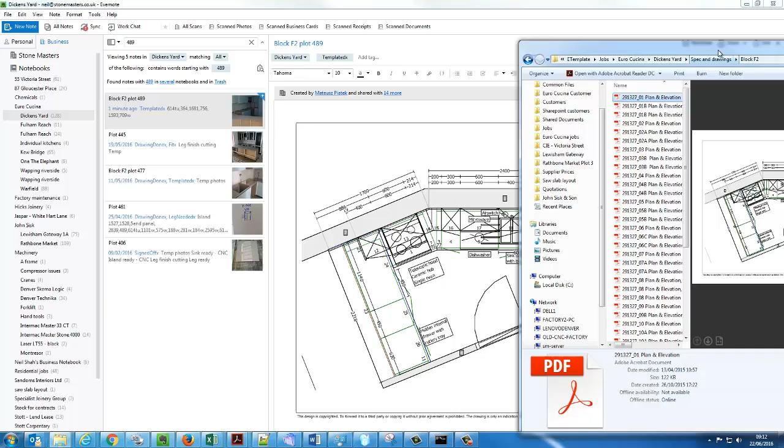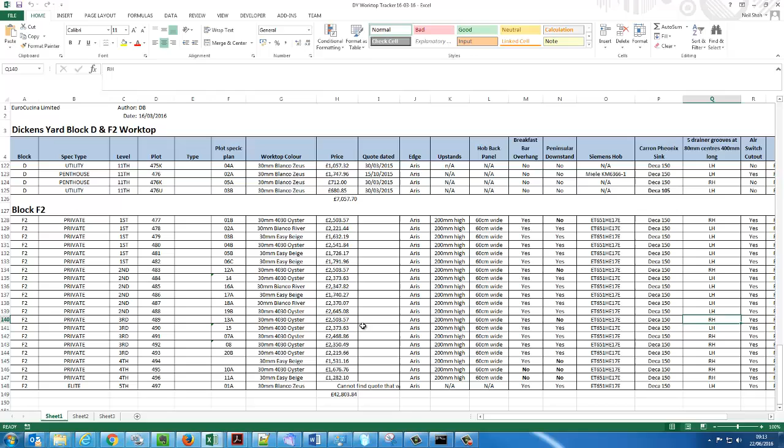The other thing to notice is that the other plots that we've done in the past are 477 and 483. They're more or less the same. So we quickly just check the specification of these plots. So this is block F2. 489 is drawing 13A, 483 12A, but they are the same shape. The point is, are these the same in terms of the sink, which is a Deca 150, this one here, as well as any tap holes and hobs. They're more or less the same.

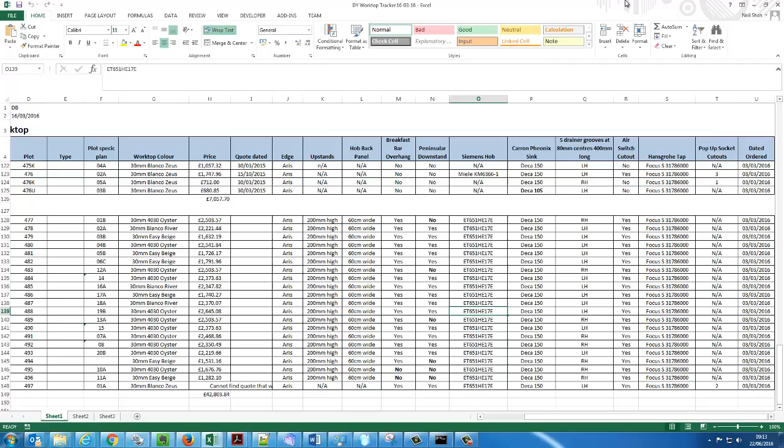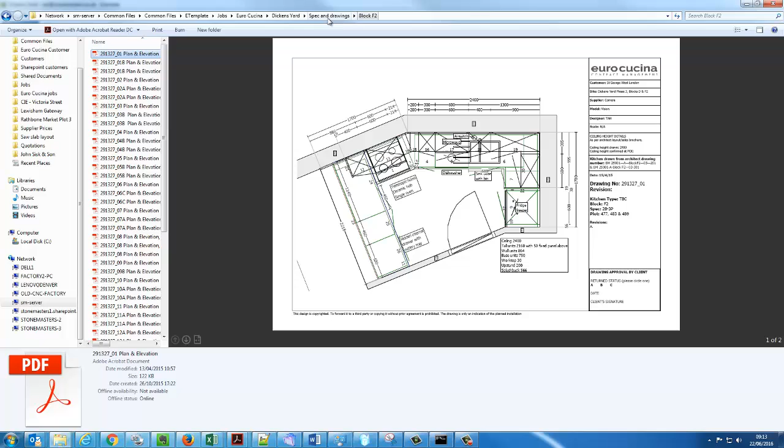So we know we can find the old drawing of 477 or 483, open that up, and then import in 489, the original laser file, to clean it up. So let's find the cutting file for 477 or 483. 483 we have here. That is exactly the same. So we know we can copy the sink and the hob details. I'm a little bit worried because I've just seen the sink with the wrong-handed direction. I've got to make sure that this is correct. I'm going to pause the video whilst I check.

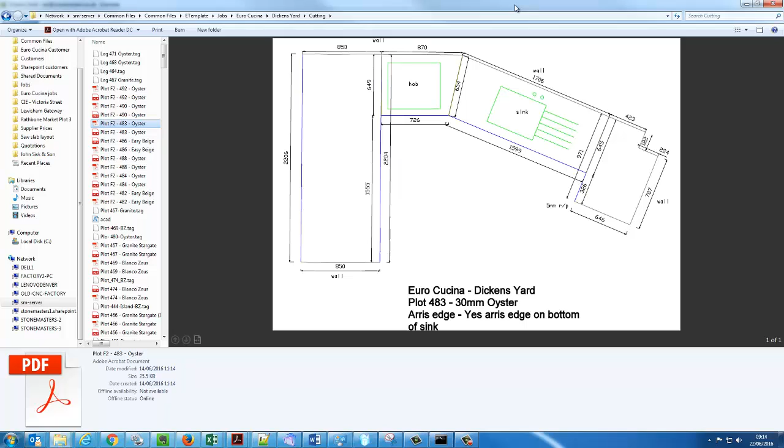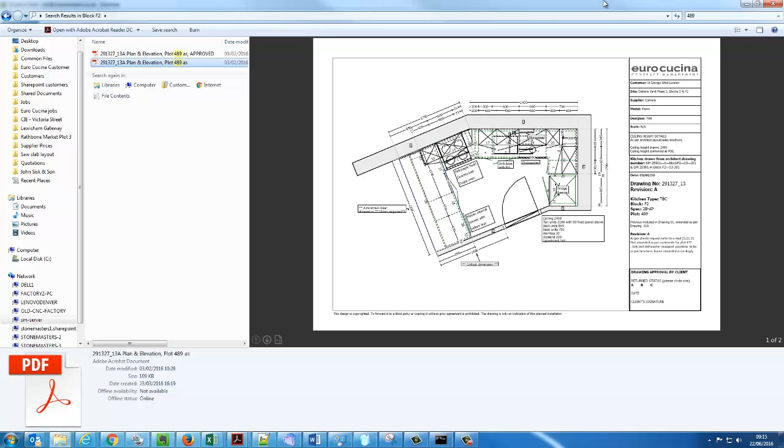So it turns out that the better way of doing this is to actually search. So when you get to the drawings folder, we want to search for the specific plot, and you can see that this has been approved by the client, status A, with the sink in this direction. So that's really the correct drawing. That's the one that we want to pull into this. So I want to delete this because this is obviously an old drawing, and drag, let's get 489. I'm going to drag this file into here, which is the correct plan with the sink in the correct place.

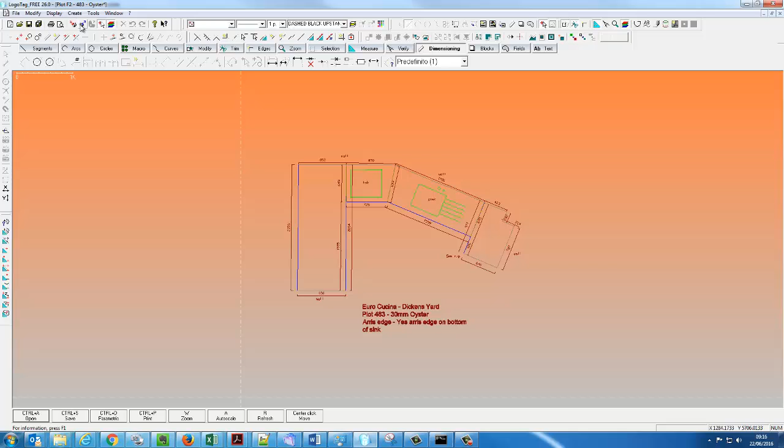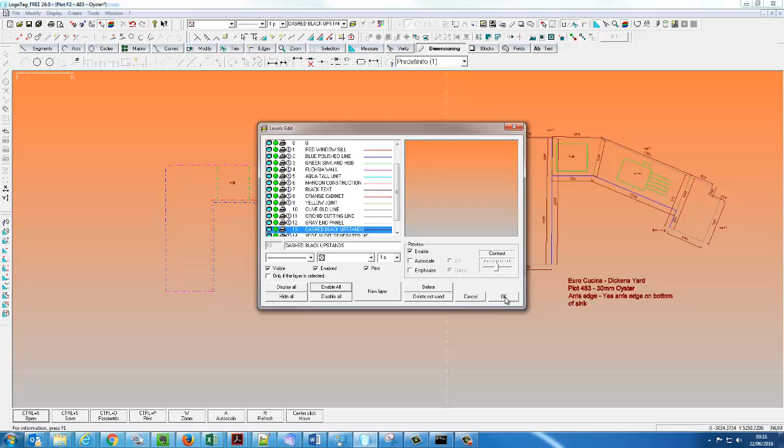So I know that I can now open up, let's copy this path to find plot 483. Here we go. Right, next job is to import in the original laser file for 489, and to unlock all the layers and display all the layers. So display all, enable all, and that way you can see all the layers, and it's now opened up all the layers here. Change these to the correct layer. So that's the tall unit.

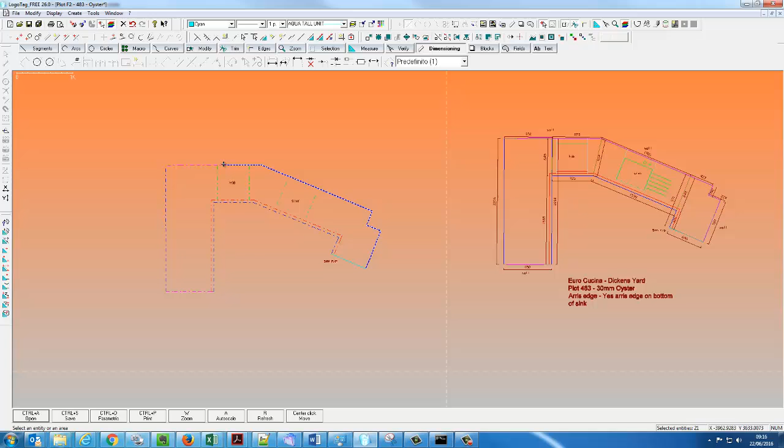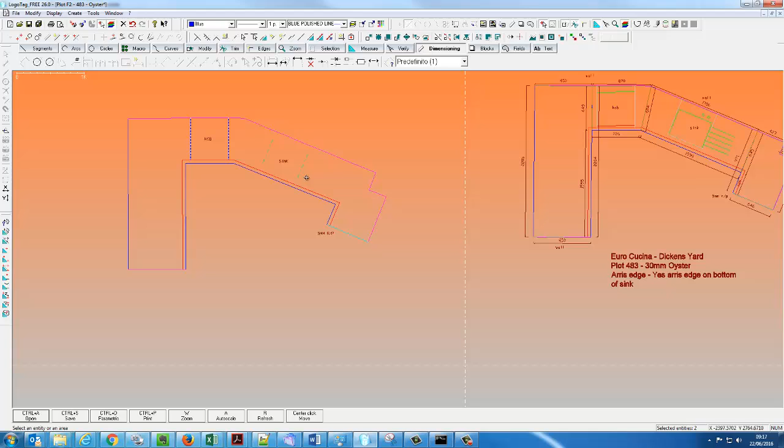Oops. Now these are your walls. So change all the layers to the correct ones. Polished line. Cabinet line. I forgot this polished line one. This is this one here.

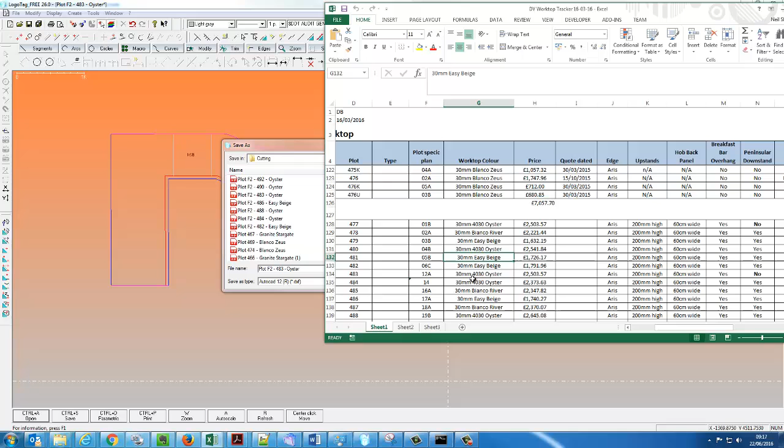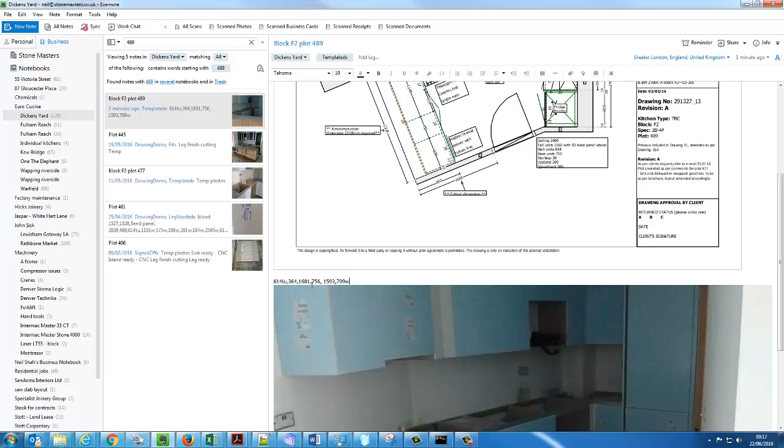Right, next job is to save as a different file name so we don't mess that up. Just check that the material is the correct one, so 489 is oyster as well. So just change that to 489 and we're good there. Next job is to check against the Evernote dimensions. So we've got dimensions given to us here of what's been templated. So 614 tall unit, 364, all these we've got to just check to make sure that this job has been done correctly. So a bit of back and forth between these.

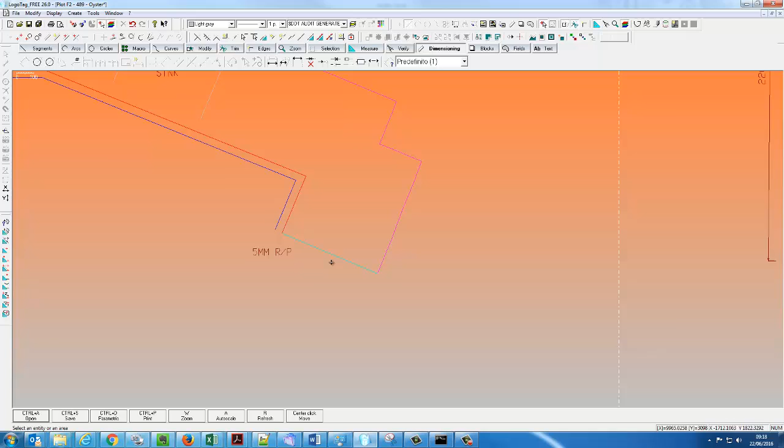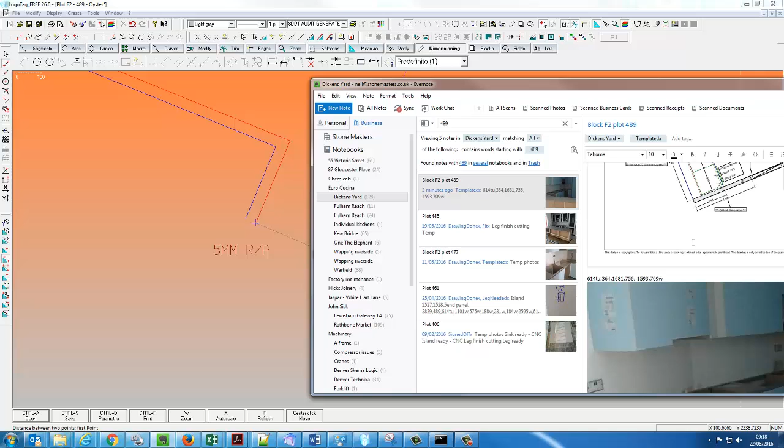First thing to understand is that the tall unit tends to get over exaggerated here, but if we use this measuring tool, this one here, we can check the distances and compare them. So 614 tall unit, now 364, so 709 for wall. Now we're gonna have the pillar, I'm guessing, which is 364 or something. 269. It's not on there, which is a pain. So I'm guessing there's nothing here either, but let's check the longer one.

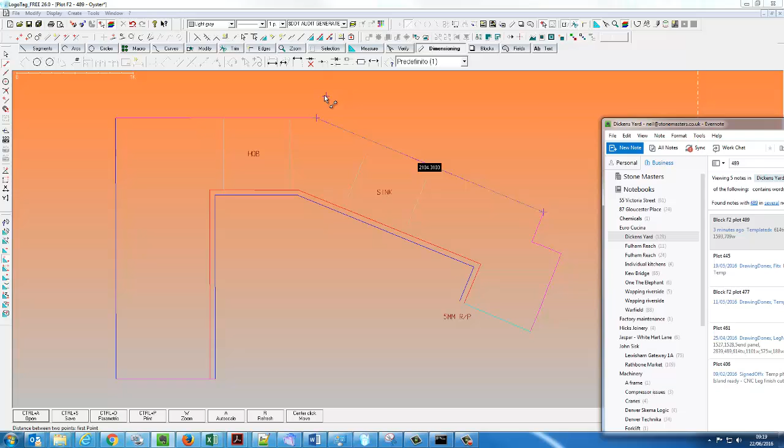2104. That measurement's not on there either. That's not helpful. That measurement will not be there, so let's start checking some of these. 1593. That's there, that's correct. 761. 0.7. So that leaves me with a question mark as to why that is 5mm bigger.

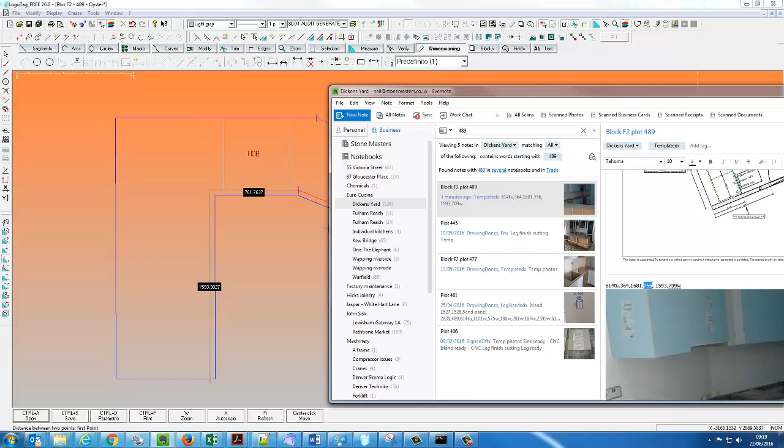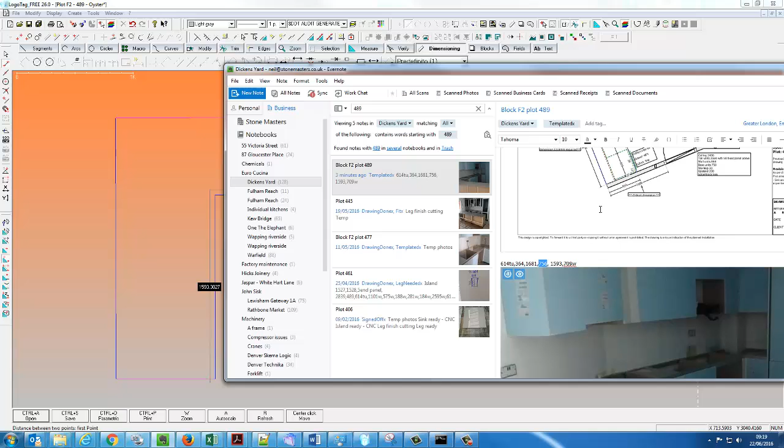1681, and then this one must be the 364. So that's correct. I need to pause the video whilst I call Matthias and ask him why this measurement is out and what are the wall measurements. So the story from the templater is that this measurement was incorrectly noted here, but it has been checked on site, so we can continue.

Right, so now that we've ascertained that the drawing is okay, we need to add in joints. We need to add in the sink and the hob, which are the same as this, and then we need to put in the title block and the cutting line, and then we're good. So let's start extending out for the joints.

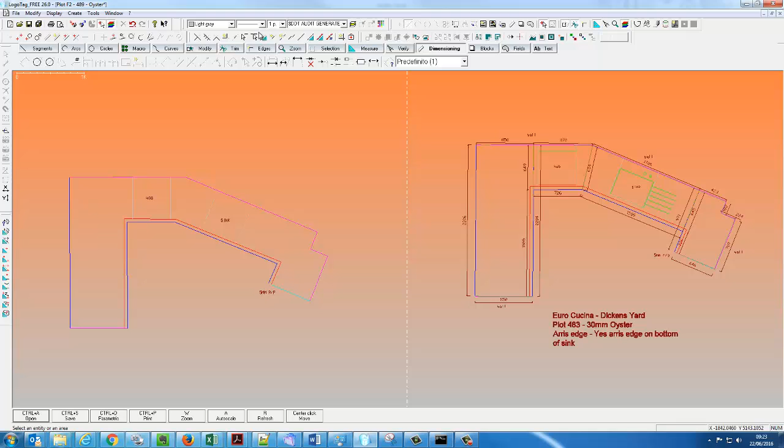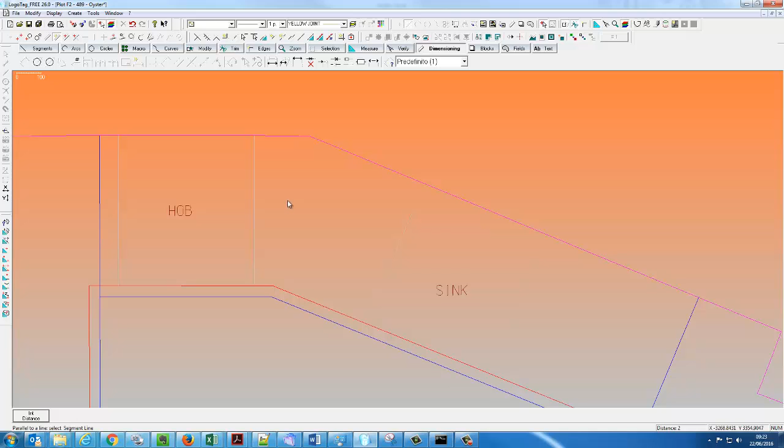Now this joint here is basically a single line from the corner to here, and then we can start moving it out to create a 1mm joint between them. Normally it's a 2mm joint. Well, let's do the 2mm joints anyway on the edges. Clean that up.

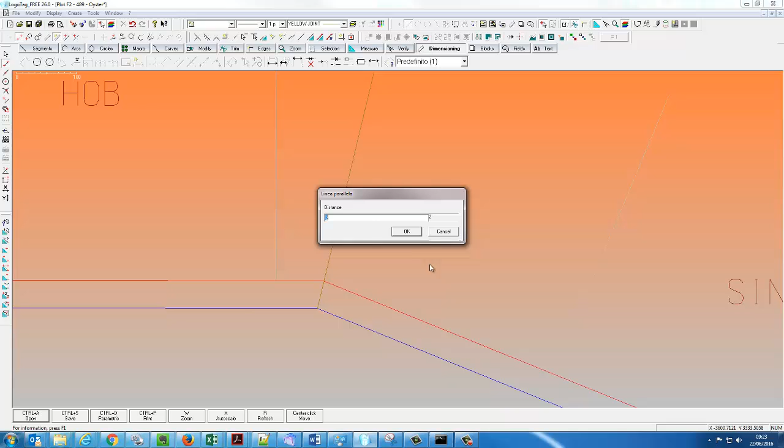And now we need a single line from here to this point here. And we're going to do only a 1mm joint here, because it tends to move around for some reason when it's on an angle. So I did a parallel line either side of this joint and delete the middle one.

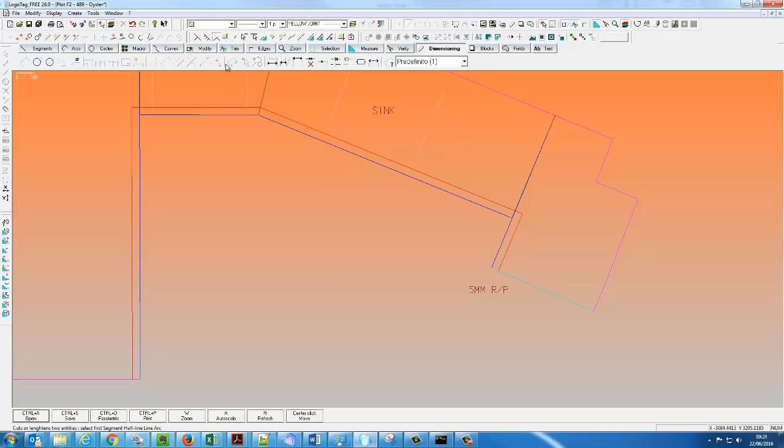I can fillet these two out to create the joint. I've left the backs open because we still haven't got the cutting lines to clean those up. Joints are done. 1, 2, 3 joints. Next thing is the sink and the hob. So that is where we're going to copy from here.

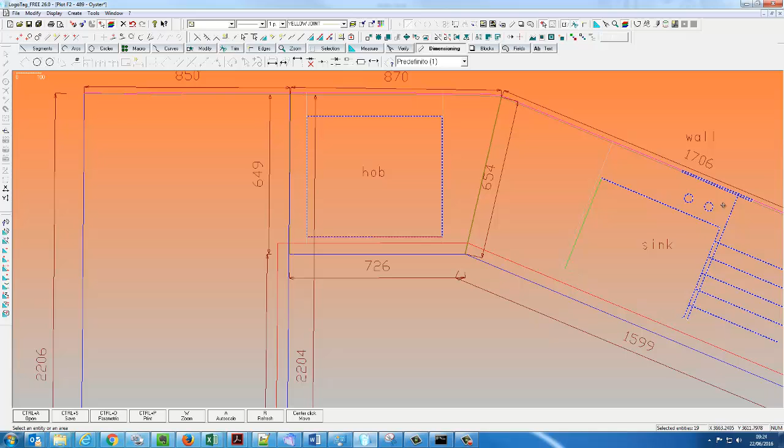Okay, so that's the hob copied. I don't need the text. And the sink. Okay, sink has been fully selected and the hob, so copy and paste. It looks about correct, doesn't it? Okay, so let's drop them out of the way. Now, as soon as I press copy, this enable copy happened, which tends to cause havoc, so switch that off.

And we want to just, at this stage, copy the title block. The color seems to go wrong for some reason, but unfortunately, copying this title block, it's very difficult to edit it. It doesn't allow us to edit it. So I just have to create a new title block sometimes. It depends, it's different per machine.

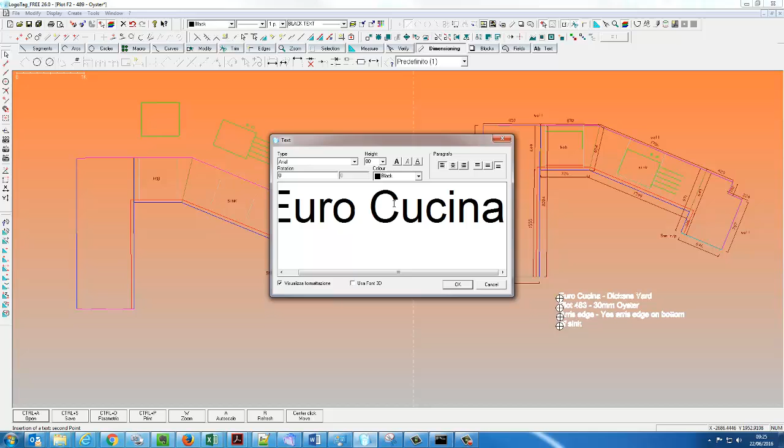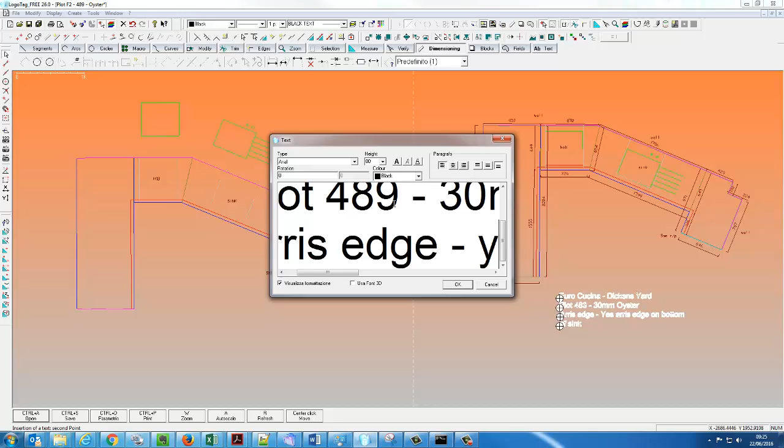And this should have been plot F2. Right, this is plot 489 and 30mm oyster. Arris edge, yes, arris on bottom of sink. I can Control X to move it and move it out the way.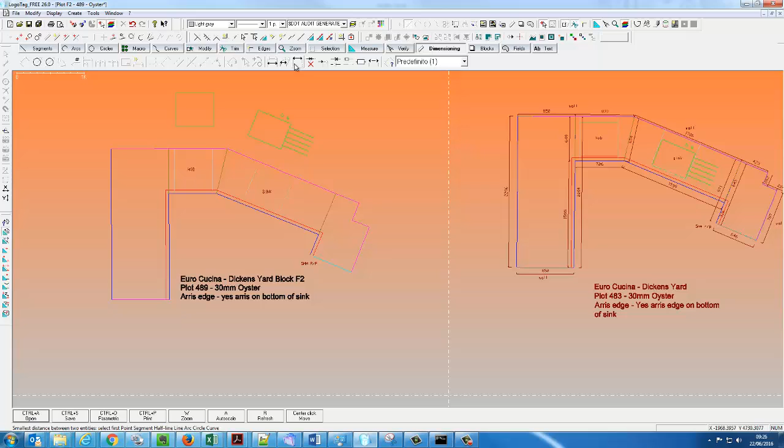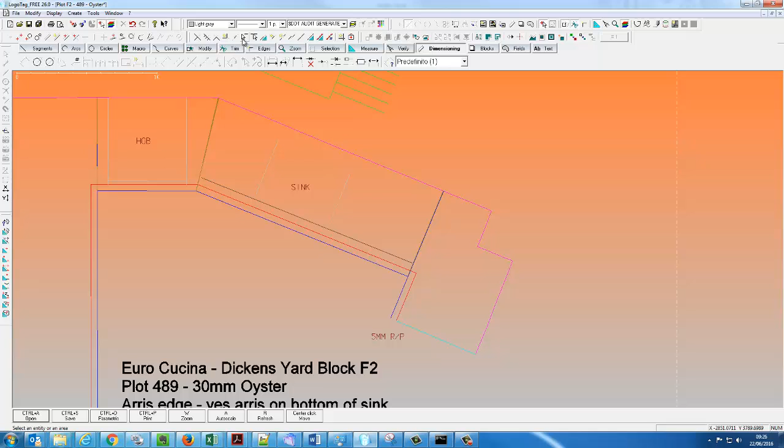Right, I want to keep only the middle. Okay, that didn't work. So let's fillet this to here and this to here. Now I'm gonna move this sink. I have to align it correctly. So do align, pick up from this side and drop to this side of the line. But you can see that it's out of position here.

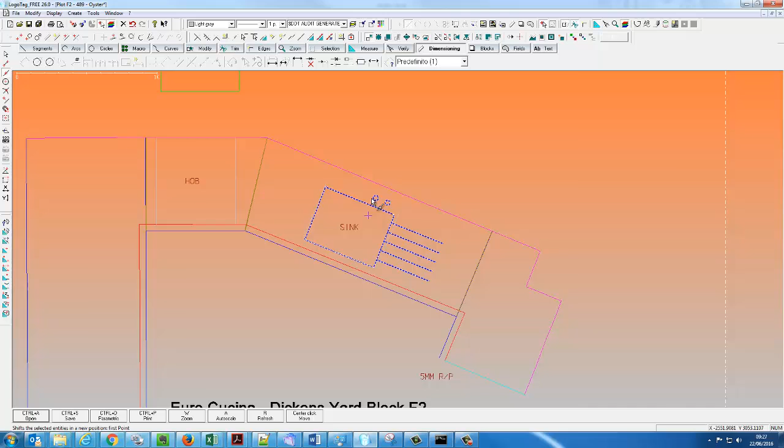So we're going to move it just using F2 snap, and now move it again, but using the midpoint snap, this one here, which is F4, and move it to the middle. That's now in the correct place. Same situation with this hob. Align it first with the bottom. Now move it out the way using F2 standard snap, and move it again using the midpoint snap. That one to there. That's organized that.

What do we have left? So this is now useless. We want to delete this and save the project.

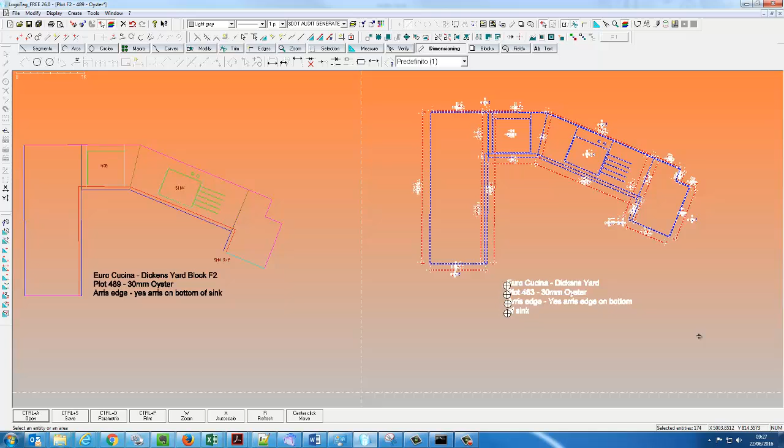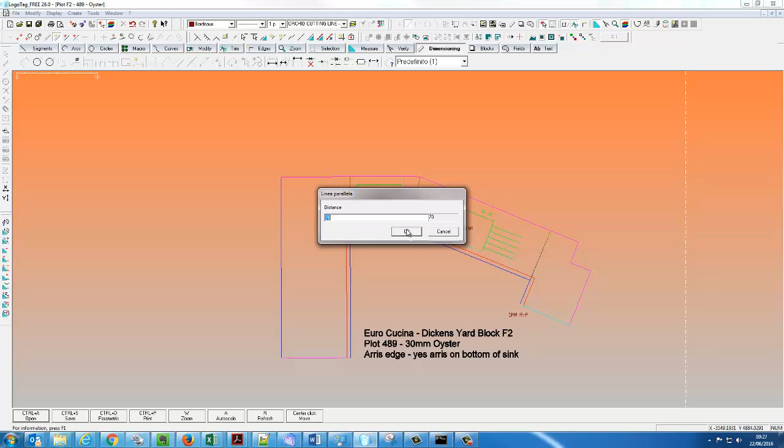Next thing to do is to do your cutting lines. So go to the cutting line layer, change it to maybe a Bordeaux, make sure it's not red or yellow. We're trying to avoid those lines for the cutting machine, and start putting in your tolerances. So 1mm when it comes to the tall unit, and wherever the worktop's going to be seen. So you can see from this image that this is going to be an outer edge that is seen.

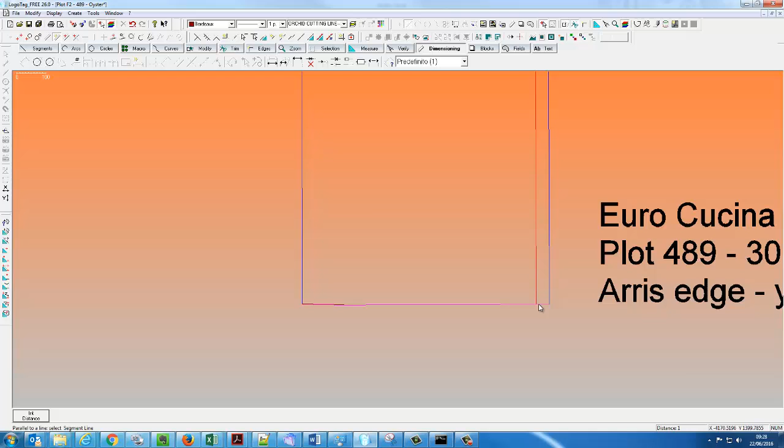So that's going to be seen, that's going to be seen, and that's going to be seen. The rest of it's not going to be seen. So the rest of it, in this particular site, we have upstands. There's 20mm upstands, so we leave a big gap here.

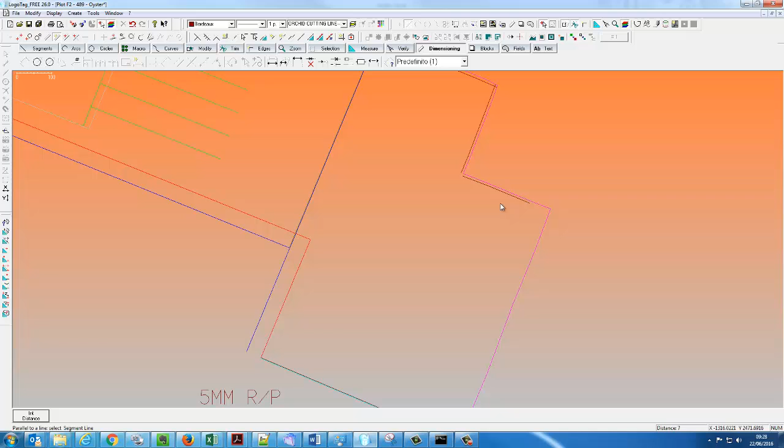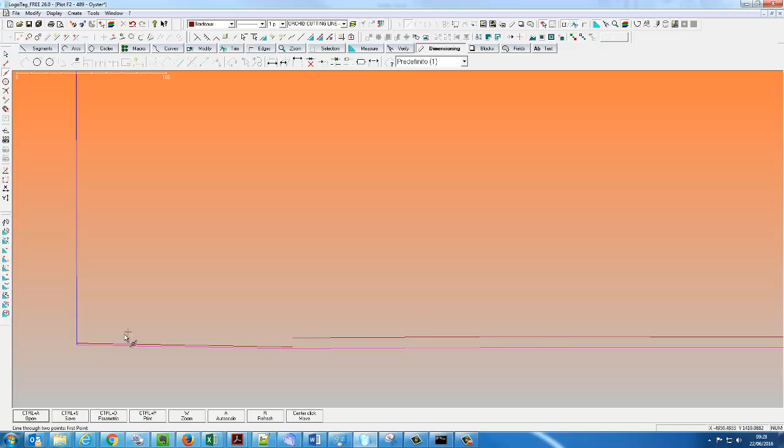Undo that line by mistake. There we go. We're sitting in a good place, and we also need to just make 7mm gap here because there will be upstands here as well. Right, we need to now make lines. So we need to fillet where I have got the 1mm gaps like that, and here.

But these lines were effectively construction lines. I don't need them anymore, because that's no good when they're disjointed from the rest of it. I'm going to draw a line using F7, so I get something that's not so sharp, and F3, so I get the end of this line. I've got to fillet this out to make sure I don't have a problem there.

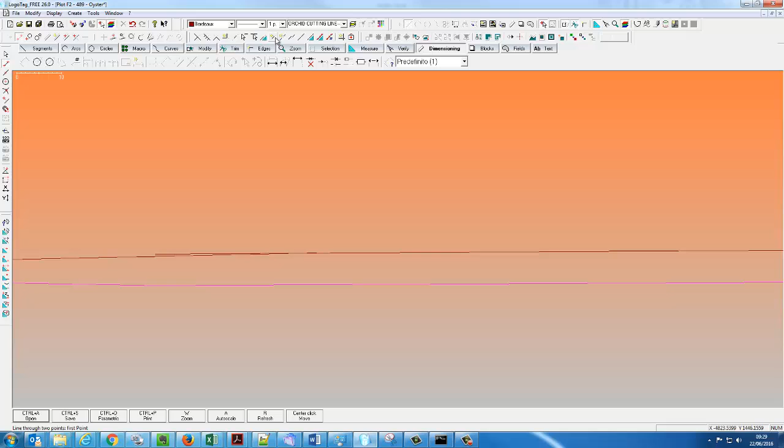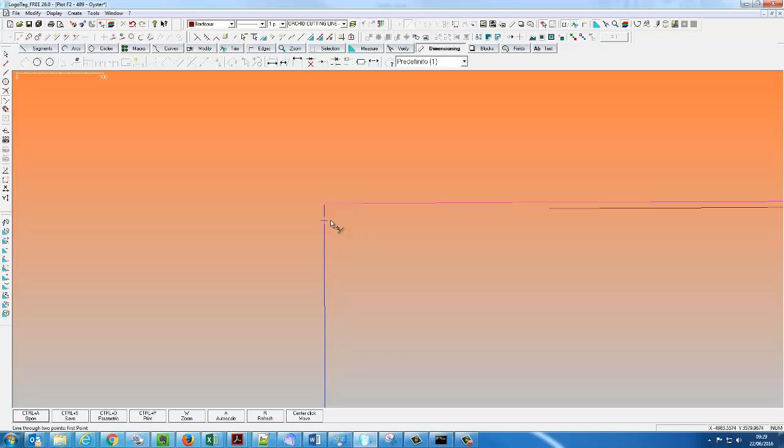And here again, I can do an endpoint line to F7, so I've got a slightly smoother line, and somewhere here. And now fillet that. There'll be some more filleting later on. Same thing here. Endpoint snap, endpoint for a line, and this we probably can just do to here. It's sharp enough. It doesn't matter too much.

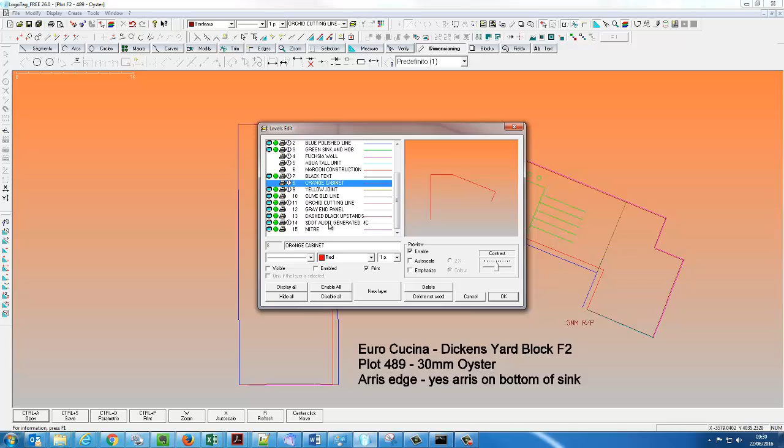So save this. I no longer need most of these layers. So normally I don't need layer 4. Wall, tall unit, I don't need construction, even though I don't have any construction lines here. Normally I do. Orange cabinet, I don't need the carcass lines for the hob and the sink. The rest of them are good.

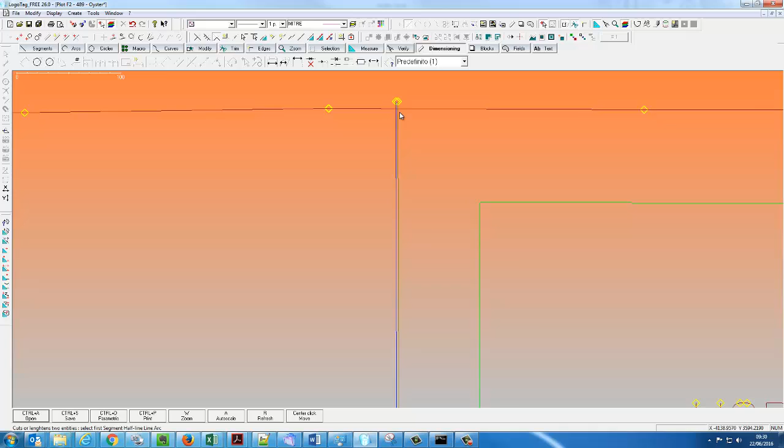Now, next job is to press C on the keyboard, C for cat, and you get to understand where the piece is disjointed, and you fillet out the bits that are disjointed. Except for here, where your hob joints are, which you need to just trim away. The same situation is going to be here. You can delete that out. That's meaningless. Going to have the same situation here also.

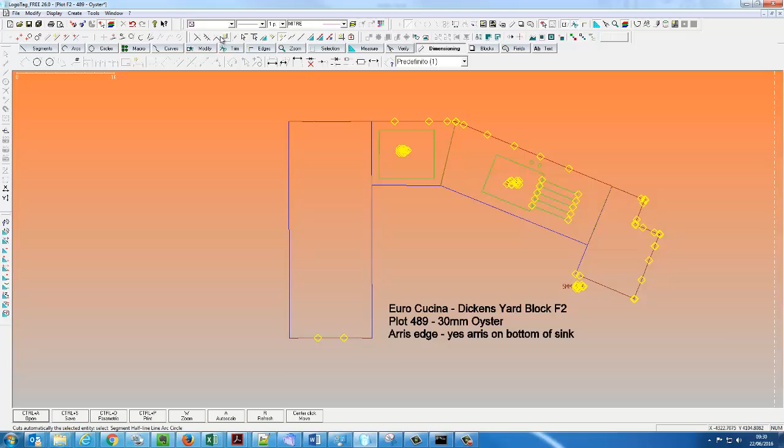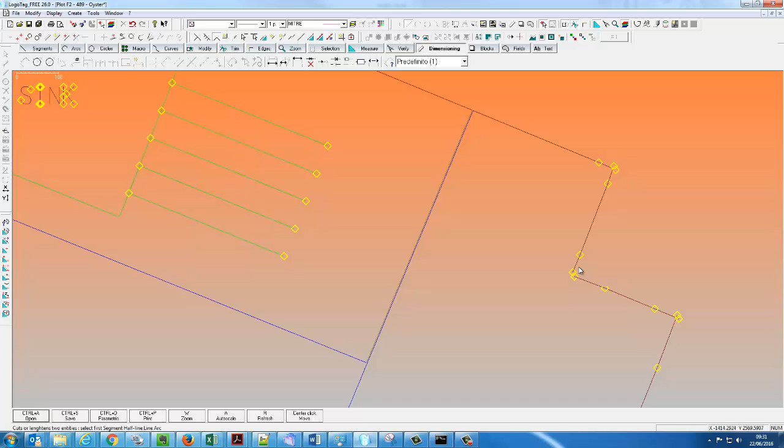Right, press C again, and now start filleting all the bits. Keep pressing C if you wish to understand where the fillets need to be and which ones you've already covered. Okay. So we just carry on doing this.

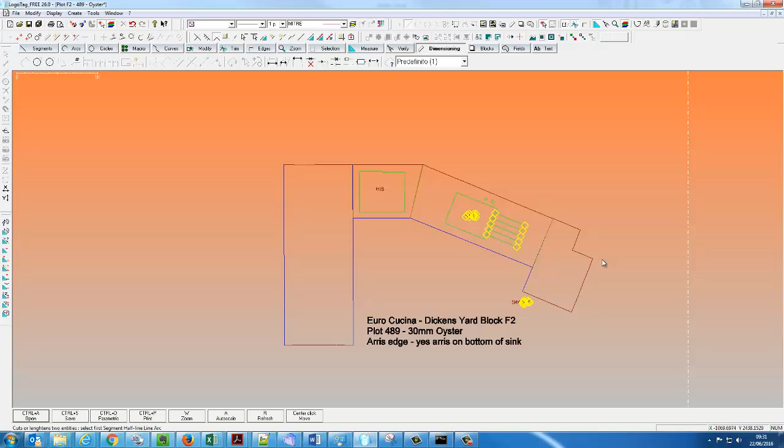Okay, so we now have a clean file, because if I press C, yes, I've got the text being picked up as well as the drainer grooves, but that's meaningless. It doesn't affect anything. Press R to just make the drawing clean again. The last stage of this is to put in the dimensions for everyone. So check the dimension properties and make sure there is black text and the color is actually black. That is the case.

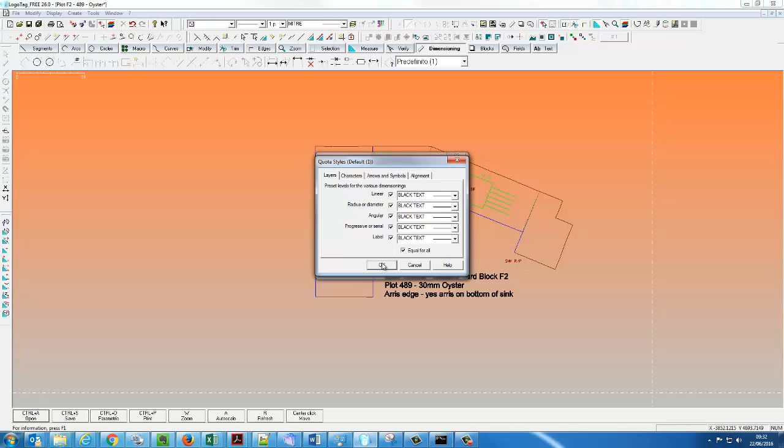So you have to check if this button is depressed or not. That means I've got to press somewhere twice. I'll use that later. The first job is to get it unpressed, and just pick out the full lines. That's normally the polished edges, the joints, which I pull to this side, full pieces, joints, and tall unit. Now I've got to press this one and do the endpoint snap to give me the rest of them.

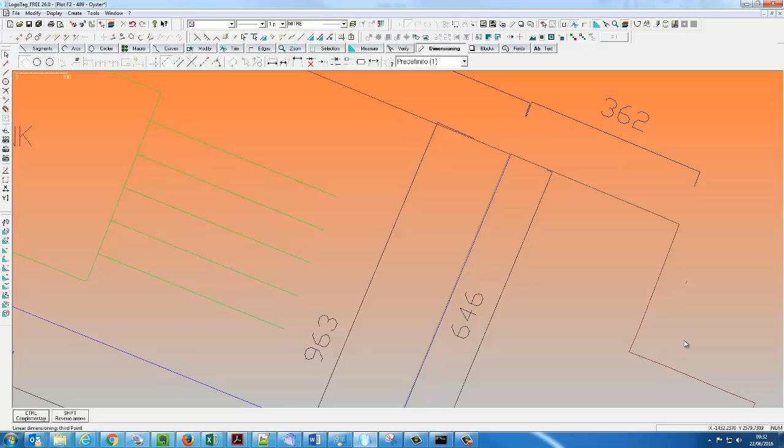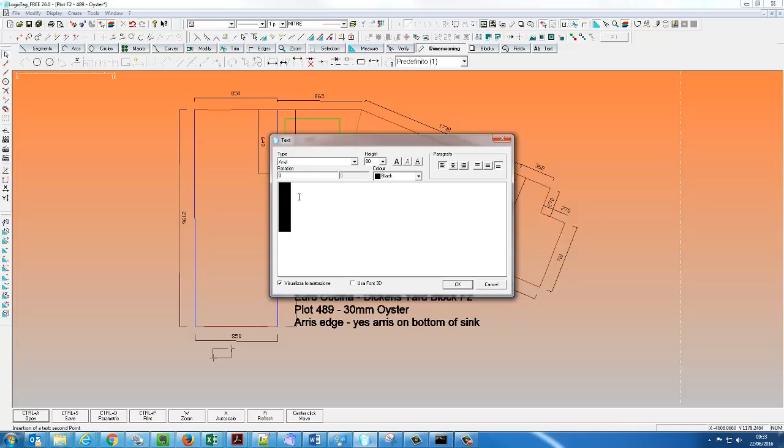That covers that side, and the last side is this. The last side, which I should have picked up from the old drawing that I deleted, was just a small note to indicate where are the walls, where are the tall units. So if I just drop a line here, highlight this and change it to 35, now I can write in wall.

And highlight it, Control C, and just copy it a few places so it's dead clear where they have to polish, where they don't have to polish. And then I'm going to put it here, but just adjust it now to tall unit.

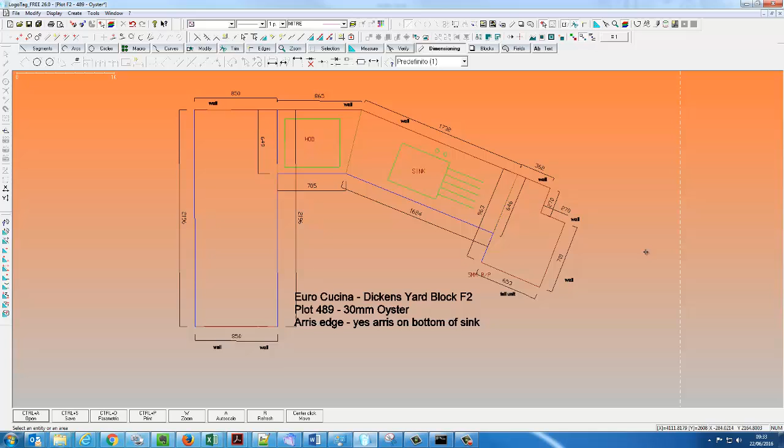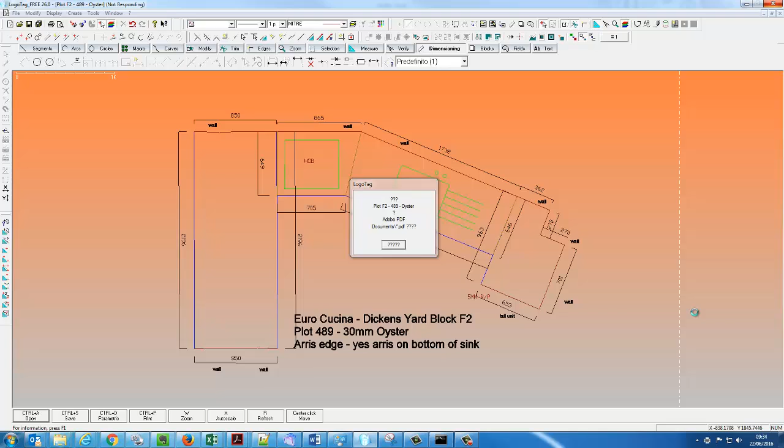That's the finished drawing. Save it, Control S, print it in either CutePDF or a thing, and make sure you get it into the correct place. So this is going to be in Euro Cucina jobs, Dickens Yard, cutting, and that's the correct file name. And momentarily you should see that we have the finished drawing there. So that's the end of this video.